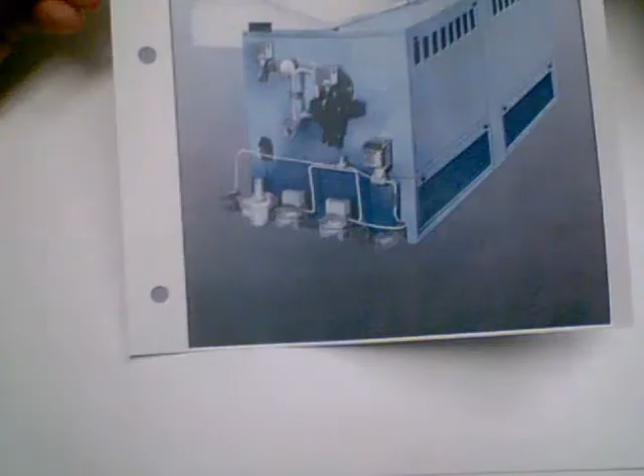First of all, it is a boiler, so it's steam, not hot water. Sometimes people are confused by that. It does actually generate steam, and it looks somewhat like this.

It is the source of heat for the office side of the church, the two floors, the chapel and so on, and in the upstairs offices is all radiator steam heat. The other side of the building, the sanctuary, Ackerman Hall, narthex, all of that is forced air, and that's what was replaced recently with the 5 new forced air furnaces.

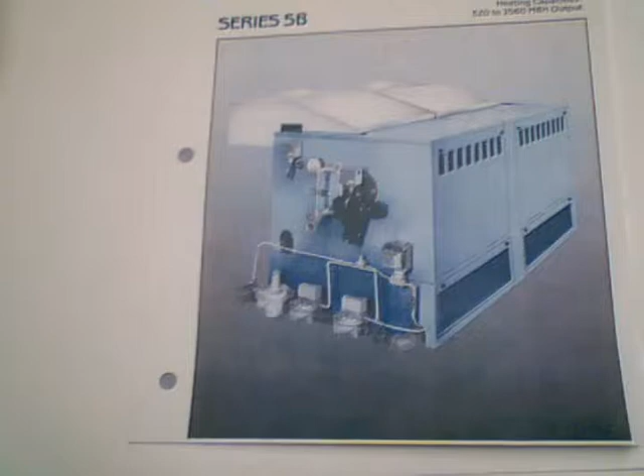The boiler is about 12 years old. It was replaced in about 1990, I believe, 92, somewhere in there. And of course the piping and the radiators and so on are all original to the building, about 85 years old.

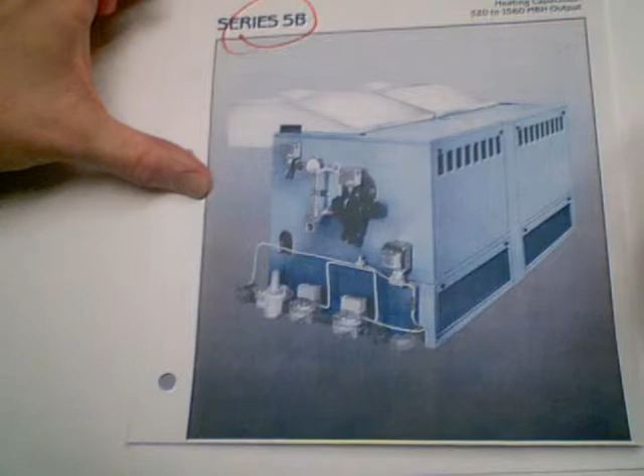So this is a Burnham Series 5B, and it looks just like this. However, we only have one section. This comes in multiple sections, so we have one section. And we'll have some video here shortly of the actual unit, but what I want to do is just show you some of the controls so you can see that it's really fairly easy to understand what's going on with the boiler.

All this is a big cast iron tank. It's actually sections in here and so on. But it holds about 50 gallons of water, and it boils the water and makes steam.

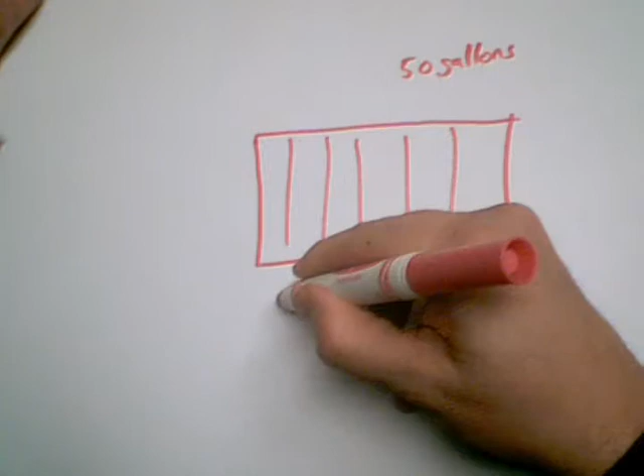It's just that simple. So underneath here is a big old burner. It goes underneath the entire section of cast iron firing tubes, and then this fills full of water to a certain level, and then the steam comes off.

And there's two very, very large pipes, which is sometimes confusing when people see why there's two pipes, but that's because we need to equalize the pressure here, and we have more and more sections. We have to have more and more pipes.

Now, I'm not going to get into all of the physics of the header and the Hartford loop and all this kind of stuff, but there is some funky looking piping up here where they're combined, and it actually comes down and then back up around like this, and it goes up into the headers, and there's a reason for that, and it's for safety reasons and for getting dry steam, so that the moisture drops off of the steam, because you don't want water to carry with it.

It's called carryover. Now, safety is extremely important, because steam has the potential of doing major damage. Even a small boiler like this one could take out a section of the building easily.

A Burnham boiler of about half this size blew up about 3 years ago in Inver Grove Heights, I believe. It's on the State of Minnesota website, and it took out a good part of the house. The larger boilers, you can see pictures, take out entire plants, city blocks, things like that.

So if you've seen a water heater like a Mythbusters blow up or something, you can see that they really take off. But this is cast iron, and it's built for like 600 pounds burst pressure, which is several times that of a water heater. It certainly has a lot more heat going into it, and it's designed to deal with steam, not just hot water. So it's got a lot of potential for devastation and damage.

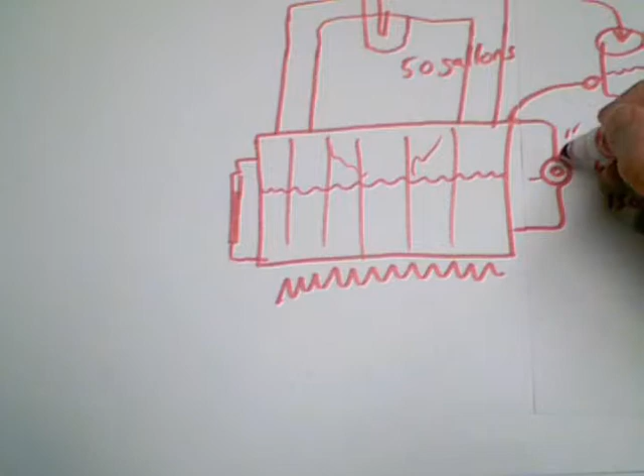So over here is a tank, and in that tank is feed water, which comes from the condensate coming back from the radiators—we'll get to that in a second. The condensate comes back, goes into this tank, and just hangs out there, and there's a big pump that feeds into the back of the boiler. So when the water drops to this level, the low water cutoff valve kicks in and turns that pump on enough until the water comes back up and turns that switch off again.

So that little float thing just goes up and down. It's got a second switch slightly below that, which is the actual low water cutoff—commonly called the low water cutoff valve—but that first one is a feed water switch. The second one, slightly lower than that, is the low water cutoff, and if it gets to that level, then we need to disengage the boiler. So the switch just opens in that case and shuts the boiler off, turning the power off to it.

So switch number one makes contact and turns the pump on, and switch two breaks contact and shuts power off to the unit.

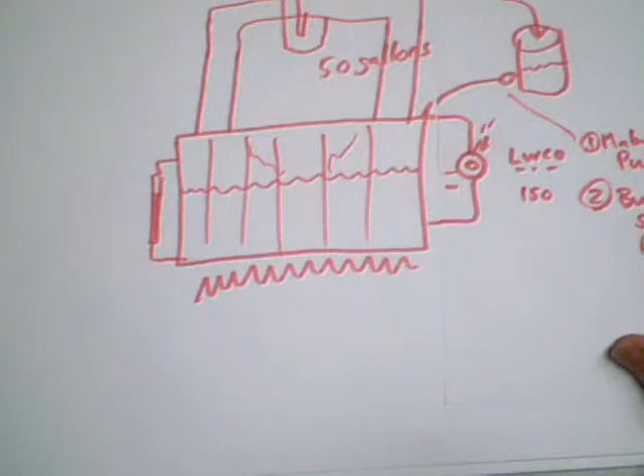Okay, so that's our first line of defense. I'm going to keep a little table over here. The three things we care about for safety are low water, high pressure, and gas pressure—that's what we care about. We're very worried about the first two particularly.

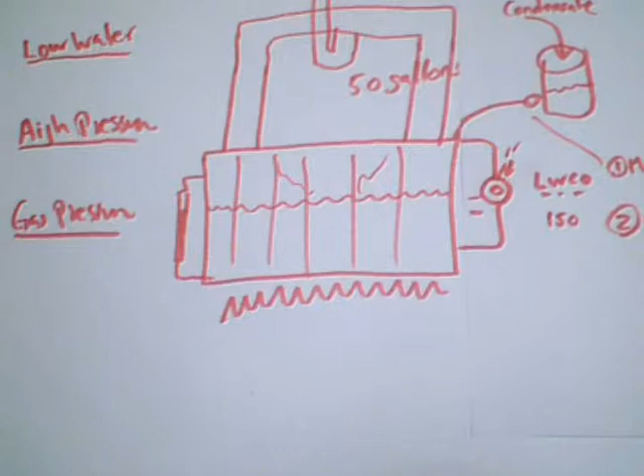So just like a plane has, we have to have redundancy, and we have to have backups to backups. So the low water cutoff, the 150 valve, is the first line of defense. If it gets to be that low, the system shuts down. But that little ball can get gummed up.

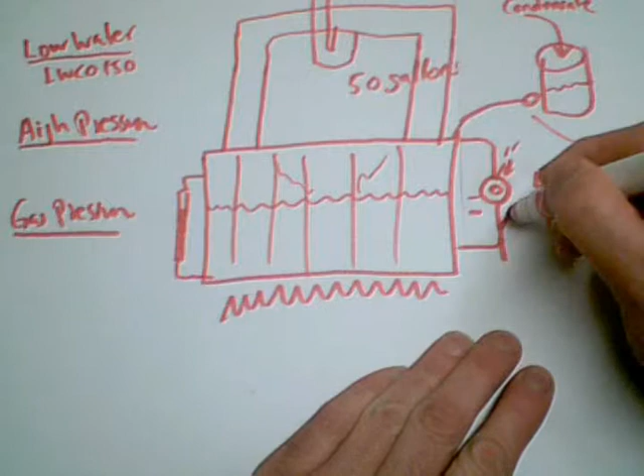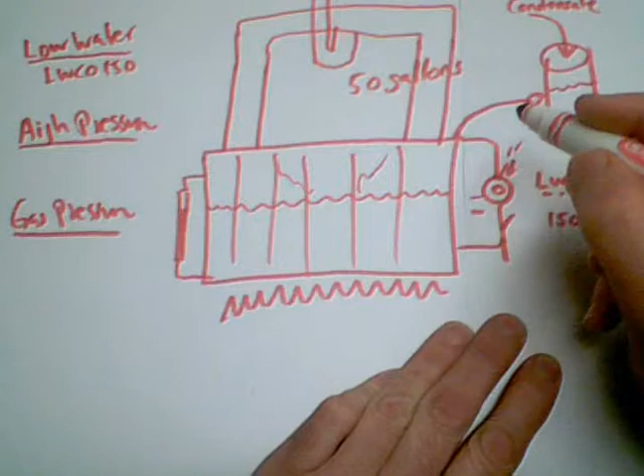In fact, that's what's called a blowdown valve—it just has an open pipe, and it allows you to open that up and thrusts the water down. The idea is to open it fairly quickly so the water comes charging down and cleans out any sediment in there. You do that typically every day, because boiler water tends to be kind of gunky, particularly when it's coming through old pipes and so on, so that gums it up a little bit from time to time, and this cleans it out.

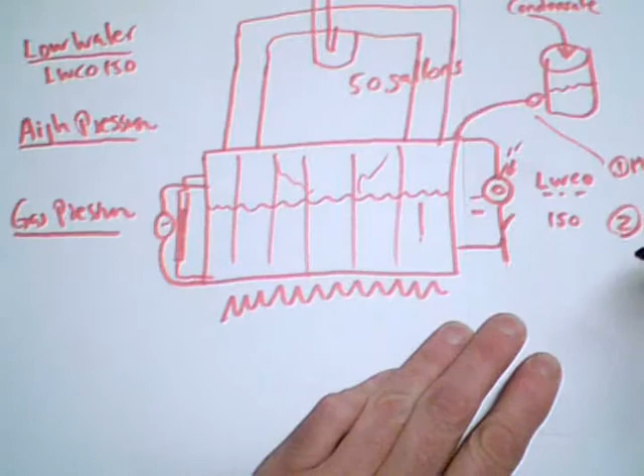But if it still gets stuck, we don't want to keep firing and let the water go down and down and down. So over on this side we have another valve, essentially the same thing, just another pipe that comes out with a valve and a float. Slightly different design—this one is a model 67 for us, and it also has two switches, but they're at the same level, so they both engage at the same time, but they're set even lower than this one is.

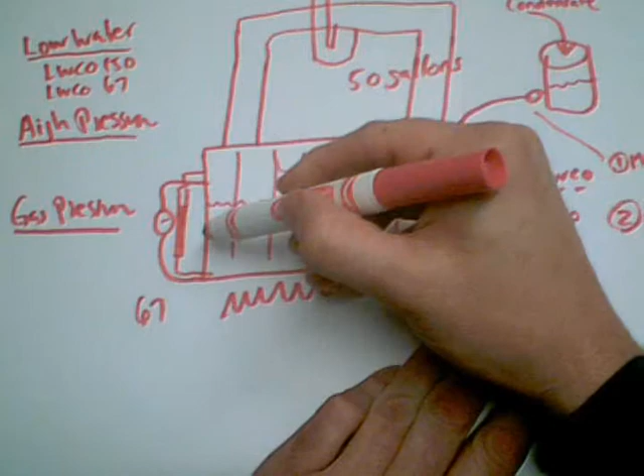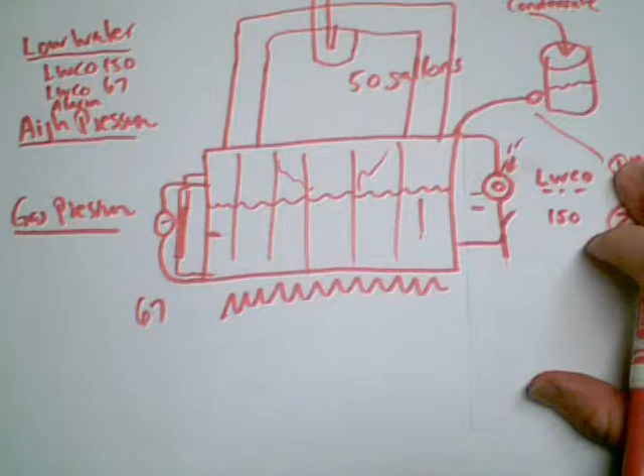So they're the next line of defense. That would be the low water cutoff 67, and then the second set of contacts in here—I actually had it wired so that sends off an alarm, an audible alarm saying that we've got major problems, and that's battery backed up. So even if the power does go off and the water remains low, it's still going to keep on honking, and if it gets to that level, we're in serious trouble.

Now let's look at the pressure. So those are the two low water cutoffs—every boiler has to have at least two, and notice that they're on opposite sides, just in case there's some damage to the cast iron structure or something of that nature that causes the water to be uneven.

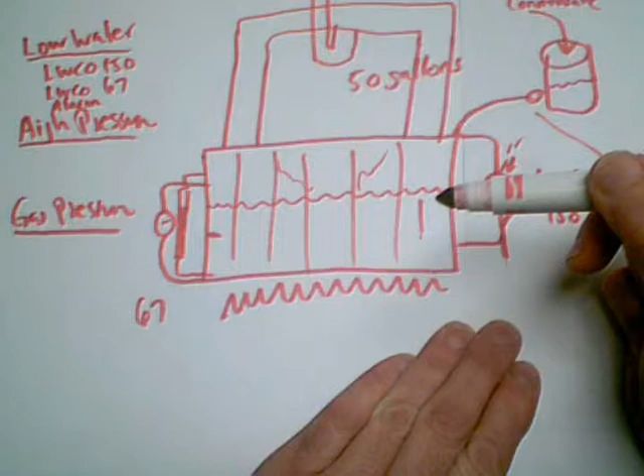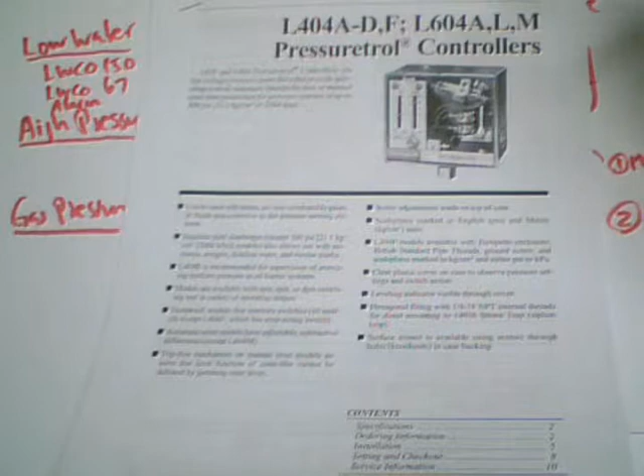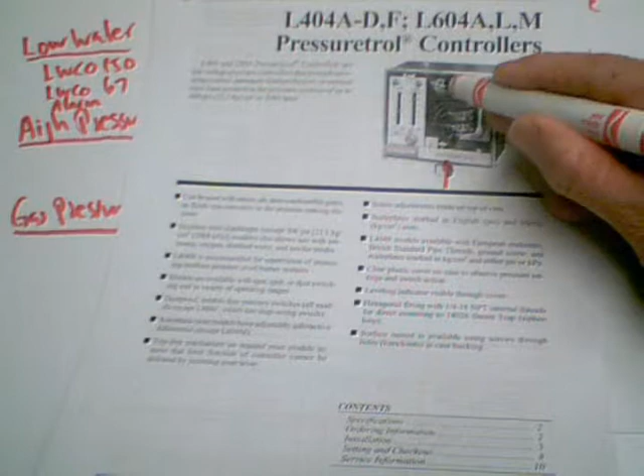The high pressure is over on this side of the boiler. There's a tap coming off the side of the boiler where the steam pressure is building, and it comes up into a little box called a Pressuretrol. It looks like this - not much to these things. All they do is have the pressure come up here, and there's a little spring in here, and a mercury switch that tips based on how much the pressure pushes this little plunger up and down. You set it for a particular pressure.

We'll get into that here in a second. So that's going to be the high pressure operating valve, the first one, because we actually want the pressure to only go so high, and then we're going to shut it off, let the steam circulate, and when it drops down again, we'll keep going. So this one is not so much a safety device as it is an operating device - we're going to call that the operating control. And that's a Pressuretrol.

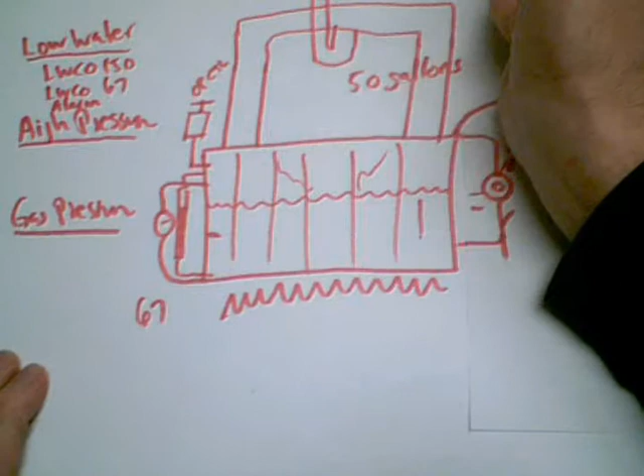And then there's going to be another one hanging off this as well. It can be the same type of model, it can be different types of pressure devices, but same concept - this is going to be the high pressure cutoff. So the operating control may be set for 1 pound, 1.5 pounds. The high pressure might be set for 4 or 5 pounds, saying that if it reaches that level, we need to do the same thing as that low water cutoff did, and just shut the power off to the boiler so that the flame goes out and the pressure will drop.

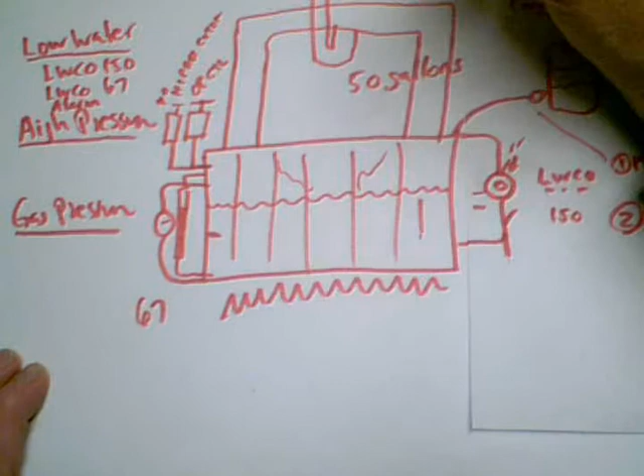So we have a pressuretrol over here, which is the operating pressuretrol, and then we have the safety pressuretrol - I didn't leave enough room for this big magic marker.

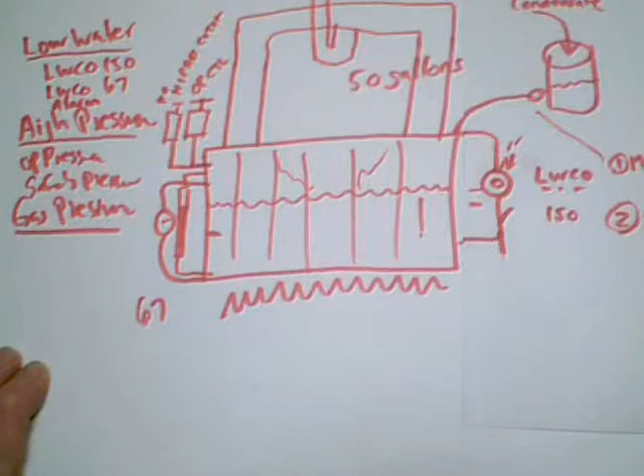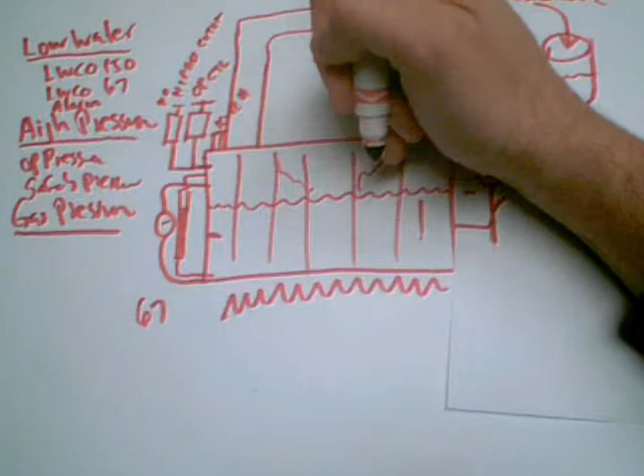And then thirdly, on this side, we have just a mechanical device - it's a relief valve, the same kind of thing that's on your water heater. It's just another valve that sits over here, and it's a mechanical valve that is set at the factory to go off, usually at 10 to 12 pounds. It doesn't have any electrical characteristics to it, no switch or anything to shut off the boiler - it just opens and dumps out the pressure at that point. So that would be the third line of defense, the relief valve - kind of like the water heater has a relief valve.

Alright, so low water cutoff has 3 lines of defense, high pressure has 3 lines of defense, and then the gas chain is similar to that. I'm going to cover that real quickly because it's not really a big deal for us.

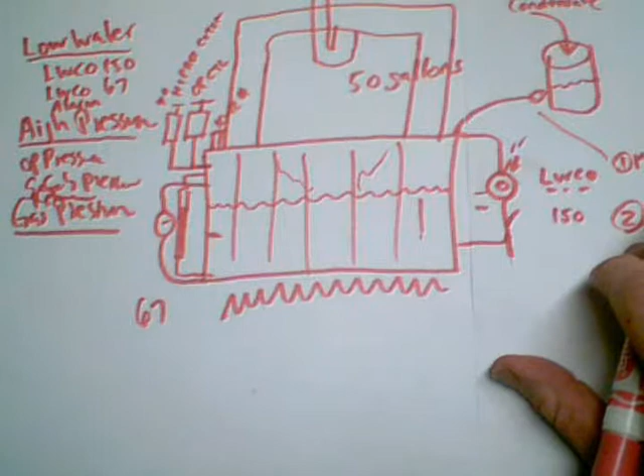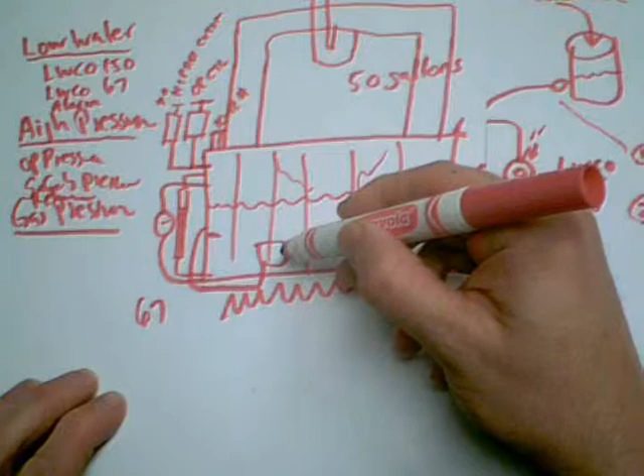The natural gas comes in and pipes around the side and into where the burner is. We have to have 2 gas valves so that they both are turned on at the same time for gas to come through, just from a safety standpoint again. We also have to have a device up here, right by the burner, that senses gas pressure to make sure that it's not too high or too low. And then in connection with that, there's a flame sensor to make sure the flame is actually there.

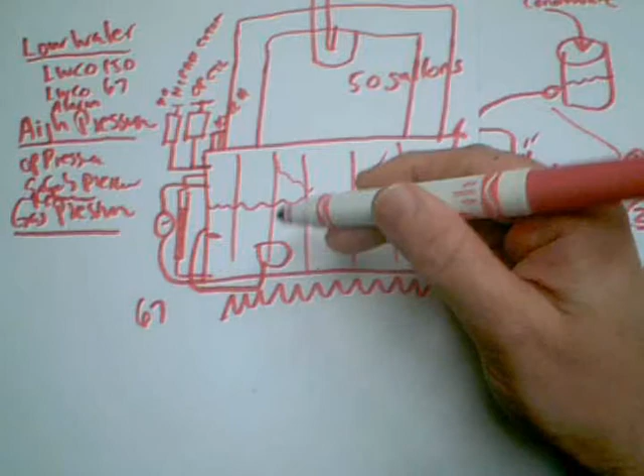Those two sense the flame for the pilot at least, and then that activates the gas so it comes in and lights the main flame, and the sensor looks for the main flame. If for some reason the main flame or the gas pressure gets too high or too low, it shuts off one or both of those valves. So the same type of deal - you've got a pressure control and a flame sensor, and that will shut down the unit if there's a problem with the gas. We're going to focus on the first two, the low water cutoff and the high pressure, because that's really where the lion's share of the issues are.

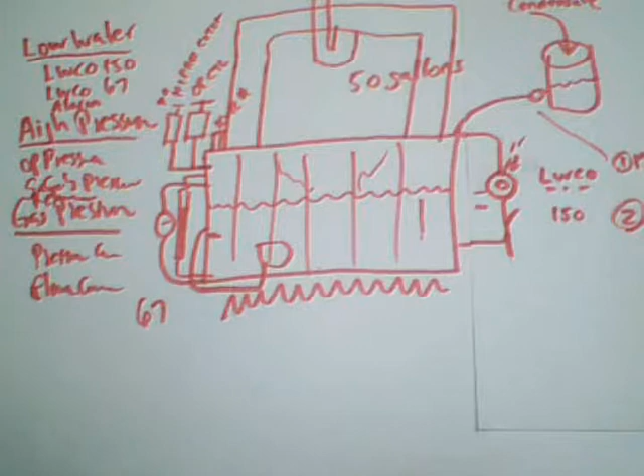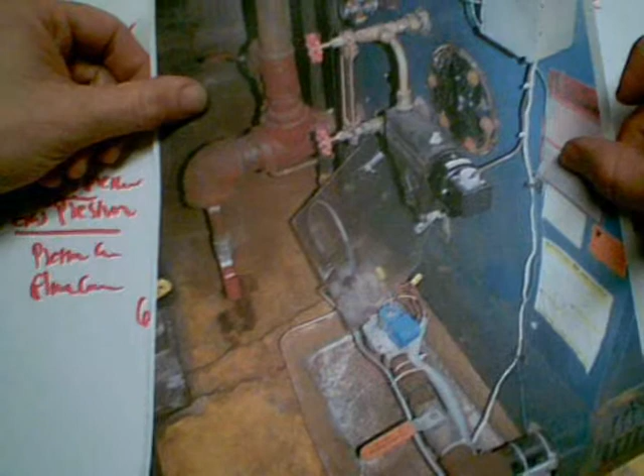This is the left-hand side, which is going to be over here, so you get kind of an idea of what it looks like. This is that 67 valve I was talking about, and you can see that it comes out of the boiler here and comes down around and goes back in - you can't quite see that part. And then here is that sight glass and valves to shut the water off if we need to. I need both of those.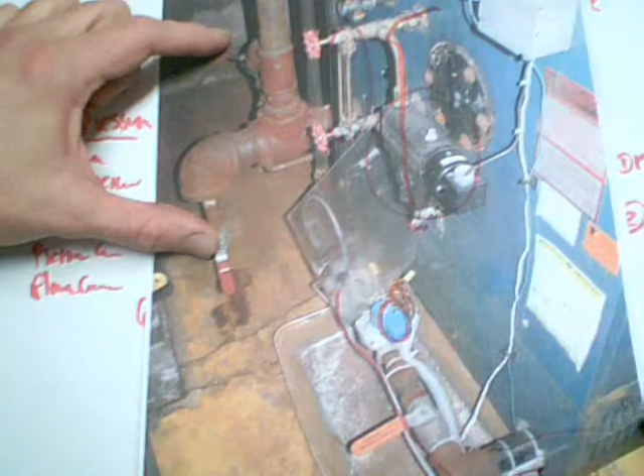Here's a gas valve - there's another gas valve inside of there, and here's the cutoff, and then the gas comes in here, and the other gas sensor is in there.

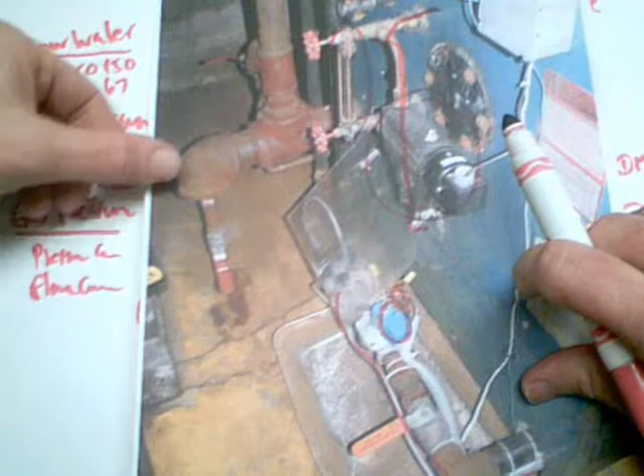There's just a piece of plexiglass here, so this thing sometimes drips, that keeps the electronics down below, or the valves down below, from getting wet. So that's what that looks like.

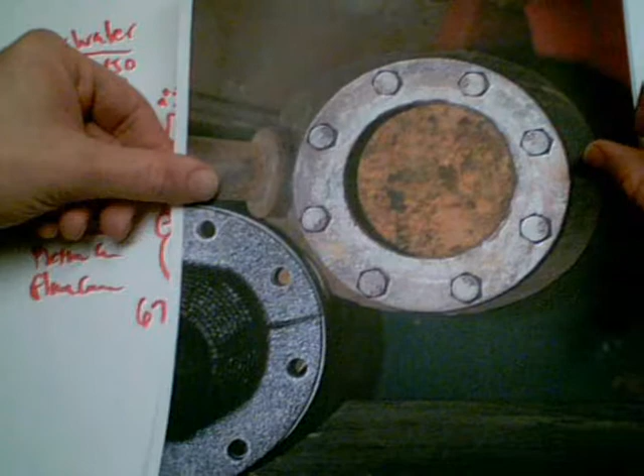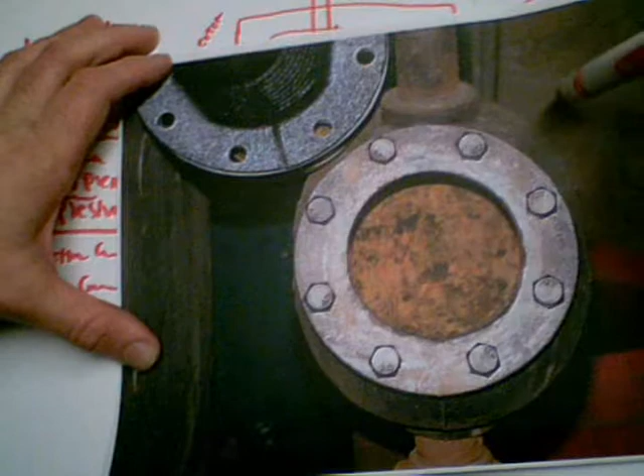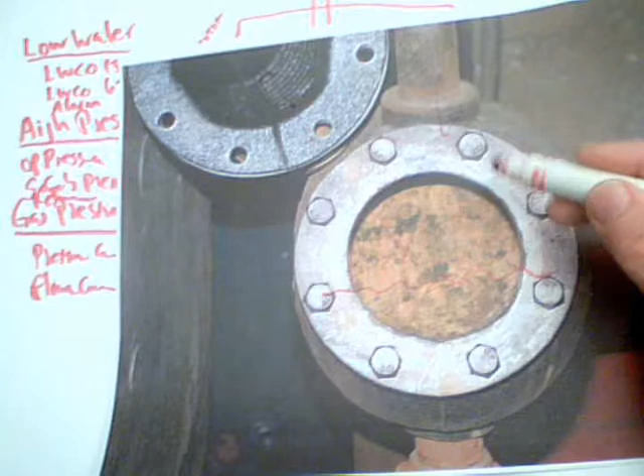I don't really have a picture of the right-hand side, but the 150 valve is kind of an ugly beast. It's this big steel ball. This one is taken apart for the season, so you can see inside. This is the piping that goes up and the piping that goes down, and the water just sits in here. This part sits on top, and the bellows here extends out, and that's where the electronics or switches are. The ball, which you can't see right here, goes into there. So it's just a big old steel hunk of a beast, but very expensive.

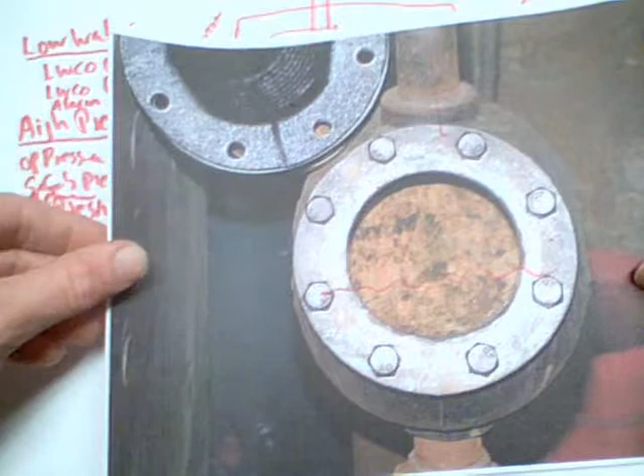All boiler parts are very expensive because of the pressure involved, and the labor is incredibly expensive. So let's take a real quick look at these guys.

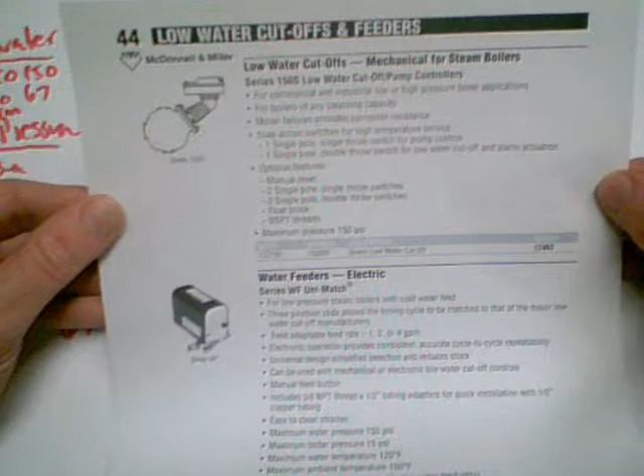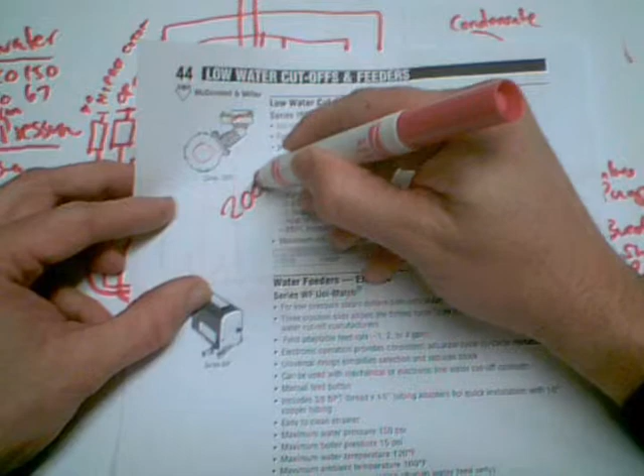McDonnell Miller 150 low water cutoff, that's what it looks like. The big ball is inside the bellows, and up here are the mercury switches—at least the old mercury switches. We now have regular toggle switches in there. This thing sells for well over $1,000, about $2,000 installed, and it only has like 8 bolts. It just bolts on, and that's about it. So that gives you an idea of how much they charge for this kind of stuff.

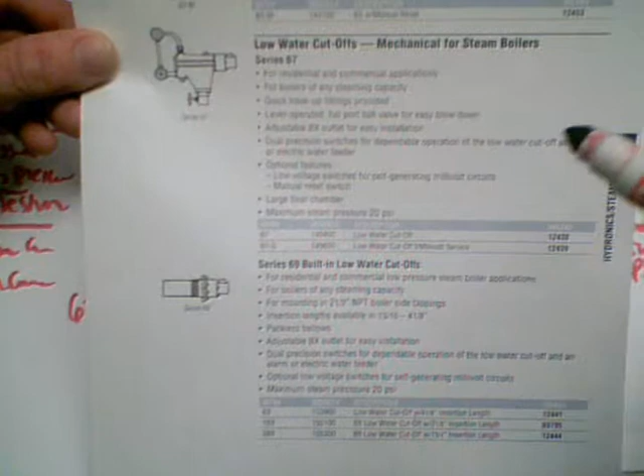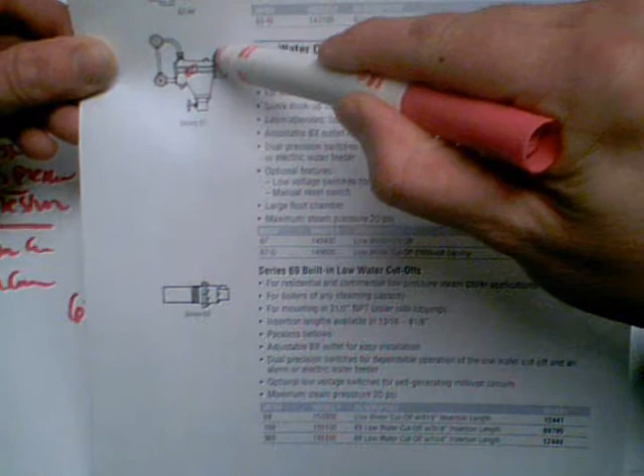This is a catalog page for the 67 low water cutoff, a little different configuration, but again there's just a little ball, and they're a lot smaller, with the switches over here. The one thing I didn't mention is that this one actually has a manual reset.

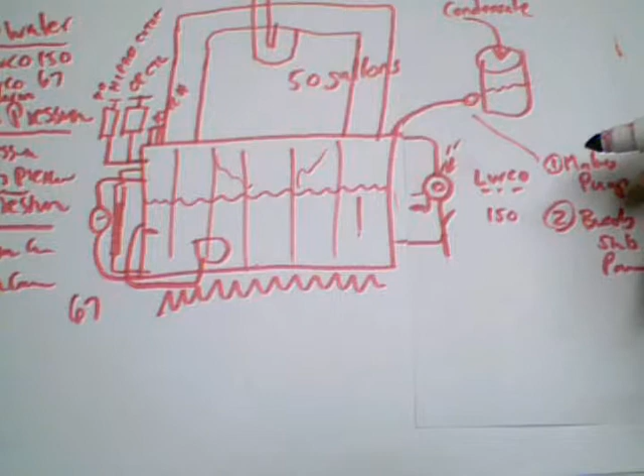So on the 150, if we hit the low water cutoff, it shuts the system off, but if the water regains—which it typically would, maybe just drop down for a few seconds—then the switch re-engages and the system starts back up again, no big deal. The one over here, though, is a safety device. Once it gets to that level, you can't start it back up again.

Ours doesn't have that right now, but it's not a good idea to have the second low water cutoff hit and then just magically reset, because there's usually something wrong at that point, and you shouldn't be messing around with that. So there's just a little button you have to push to reset it; otherwise it won't start back up again.

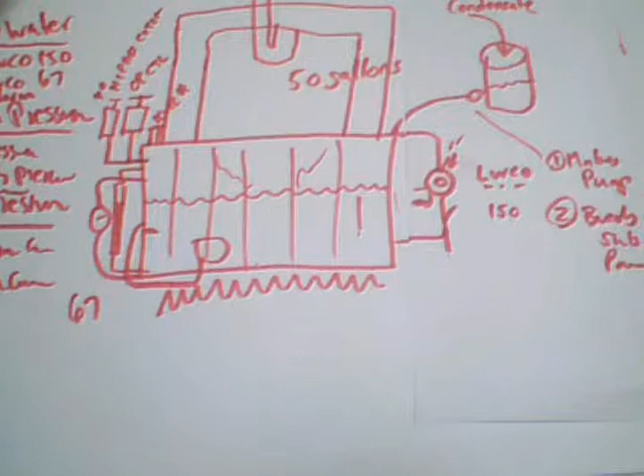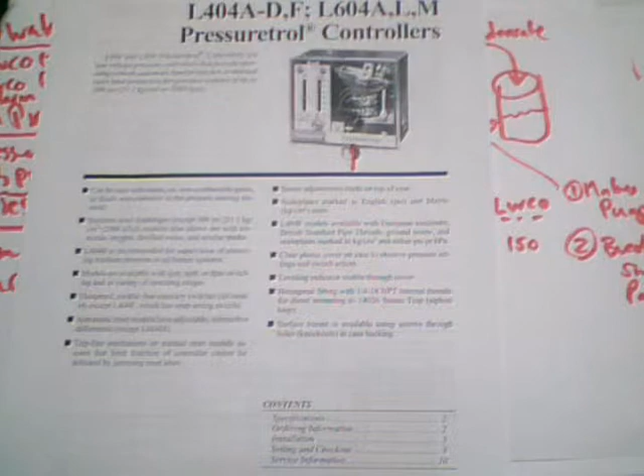Same thing goes with the high pressure. Pressuretrols look like this, and right now we have 2 Pressuretrols in there, I believe, but when the system was first put in, we actually had something even worse—Pressuretrols are not that great to begin with. We had a Pressuretrol for the safety high cutoff, but also one of these goofy little boxes like this, which is essentially the same thing but a far less precise device.

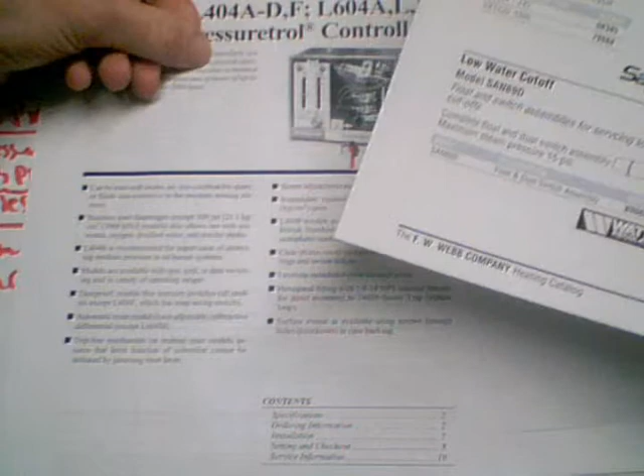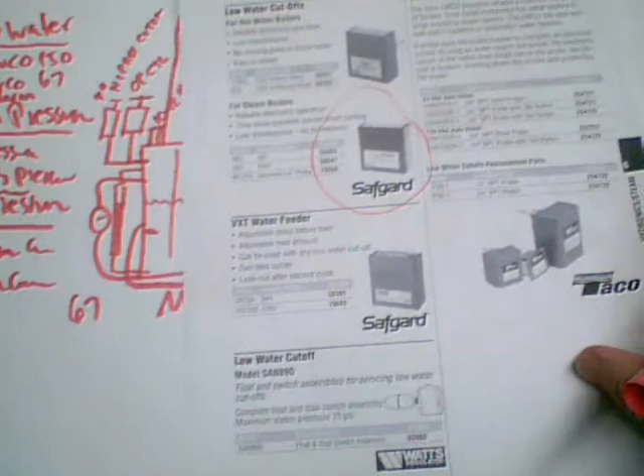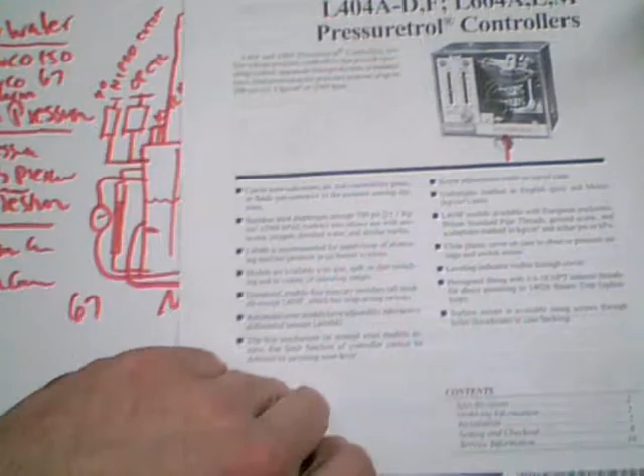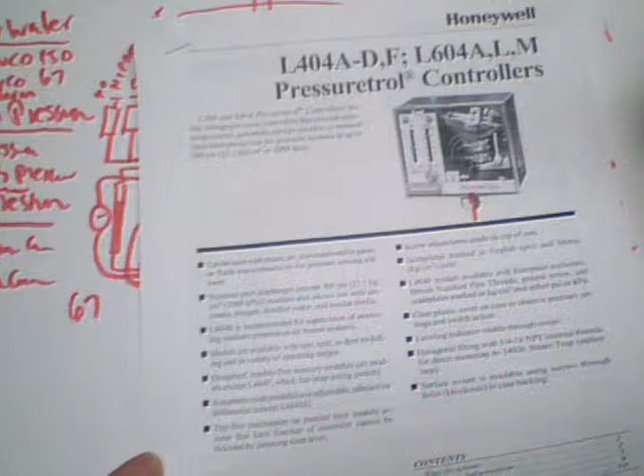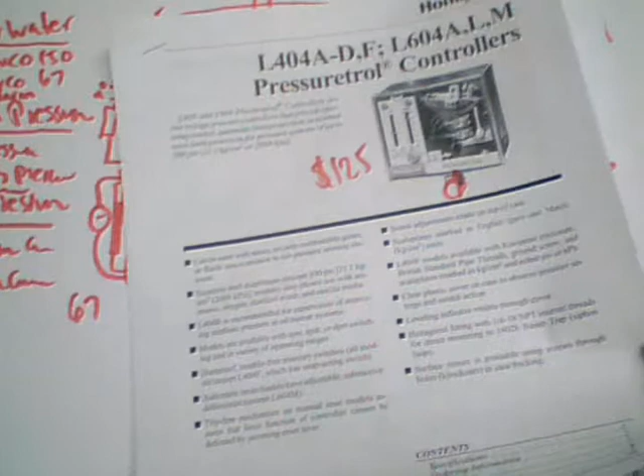We'll talk again about the problem with Pressuretrols here in a little bit. This device isn't terribly expensive, a couple hundred dollars. You can buy them brand new on eBay, or through an HVAC mail order place or a web place, for probably about $125 or so. There's just one fitting to put on and two wires, so they're fairly simple to install, and they're somewhat considered a wear item—one, because they're so critical for safety, and two, because they just wear out like everything on the boiler near-side trim. That's what this piping and controls right around the boiler is called, near side. All that stuff tends to only have a 3 to 5 year life just because of the abuse it takes. So in this case, it's a fairly reasonable cost.

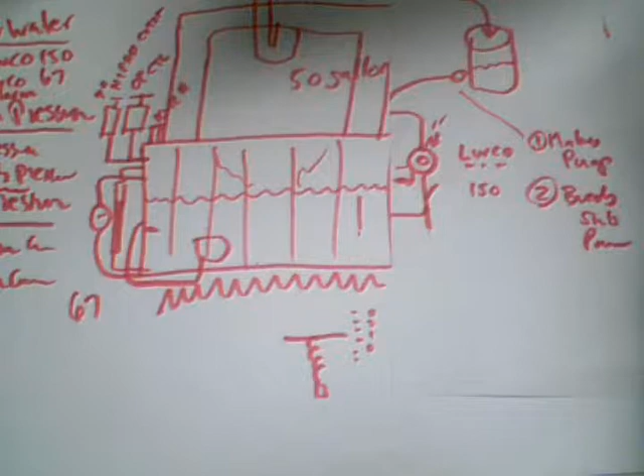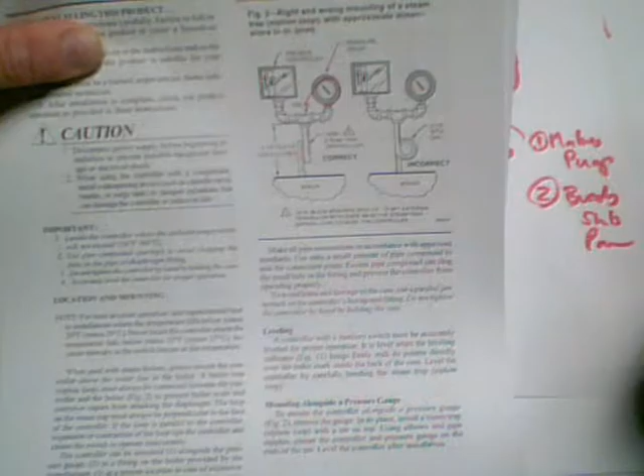This is kind of how it looks when it's hooked up. There's usually a gauge over there so you can manually read it, and that's about it.

So now the second high pressure, the safety one, is pretty simple. It just, when it hits a certain pressure, shuts the circuit off. But the operating one is a special type of control.

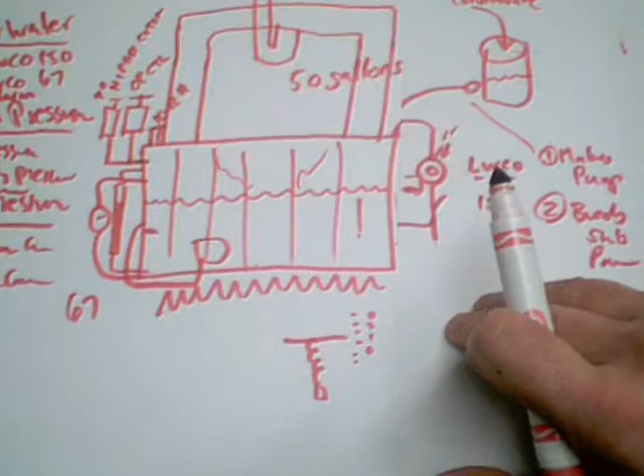It has actually 2 settings, and it uses a differential. If you remember the forced air furnaces, we had a differential there because we didn't necessarily want the call for heat and stop the call for heat to be at the exact same temperature. So it oscillates and tries to go from like 69.9 to 70 to 69.9 to 70.1.

You want to have some kind of range in there of a differential. Same thing here. We don't want the pressure to get too high, so we want to shut the boiler off when there's enough steam pressure, and then re-engage it again when the steam pressure drops to where it's not able to circulate through the piping. So that would be the differential range. The operating control, that pressure control, has 2 settings on it.

Let's take a look at that real quick. Over here on the right hand side, you'll typically put in what your operating pressure is going to be. So we may say 1.5 pounds. And then on the one over here, we'll say what the differential is going to be, and we may say a 1 pound differential. So that means it's going to range between 0.5 pounds and 1.5 pounds for the operating range.

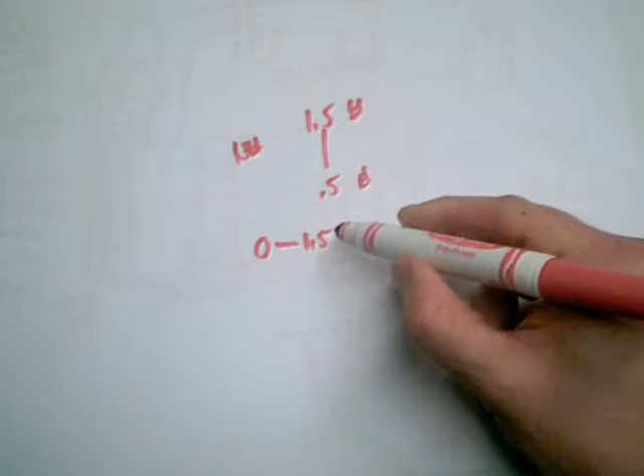Now the wrinkle to this is that it can't just operate that way, otherwise it would never turn on. So it actually will operate from 0 to 1.5 pounds, and when it hits 1.5 it will disengage, and then as the pressure drops, it only has to drop down to 0.5 to turn back on again, and then it brings back up to 1.5. As long as it stays in this range, it'll just go back and forth.

Once it drops below the 0.5, then you have to start over again. It has to go back to 0, and that would be because there's no more call for heat. So it lets the steam pressure bleed off, it drops to 0, and when there's a call for heat again, the thing starts over and goes from 0 up to 1.5. That's the one aspect of that particular pressure control that is somewhat unique and does confuse some people because of that differential.

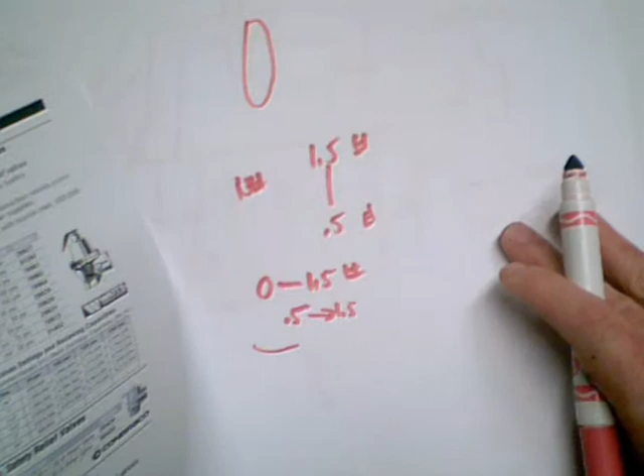A little bit about radiators and so on. I think for the most part they're pretty self-explanatory. It's a 2-pipe system. You've got the radiator up here, with the sections, and they're all hooked together. The steam comes in through a valve with a control, and then down the bottom on this side it comes through what's called a steam trap, and then goes back as water. So steam comes in and water comes out.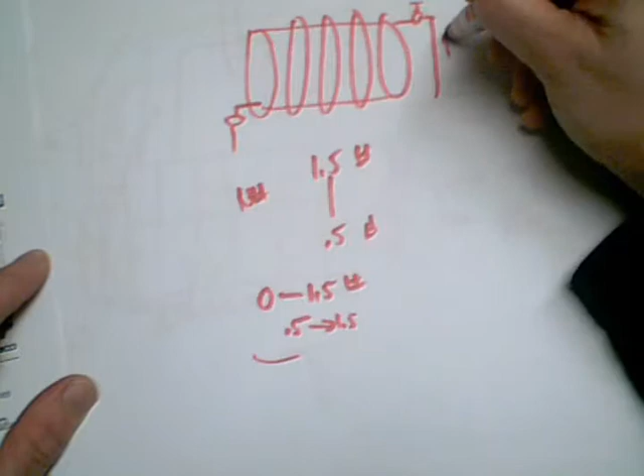This is just a simple valve, just like you would have on home plumbing. It's no big deal, other than the fact that it's expensive and it's a steam certified type device, but it's just a valve to regulate how much steam goes through the radiator. We'll talk more later about why that's not quite as simple as it seems.

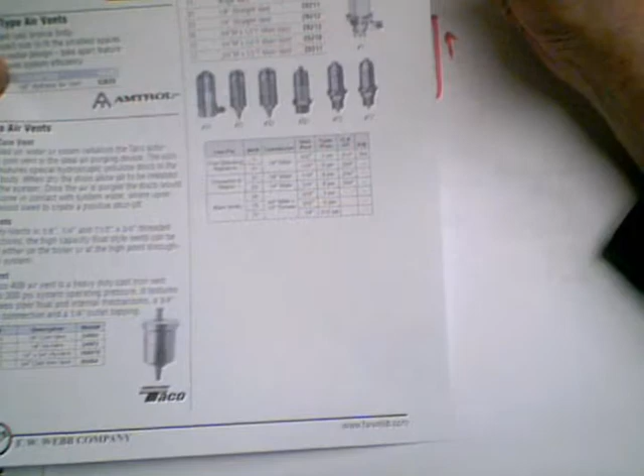The other thing that's typically on here, if it's at the end of a run or a long run, there's going to be a little air vent sitting off to the side. These are almost always forgotten, but extremely critical for even heat and energy efficiency. All they are is just little pressure devices that allow excess air to escape. As you're moving steam in for the first time, this thing's all filled full of air. The air's got to go someplace, and it can't go down this way because there's a steam trap here which blocks that. So it just builds up air pressure, and the steam kind of gets stalled, partially coming in.

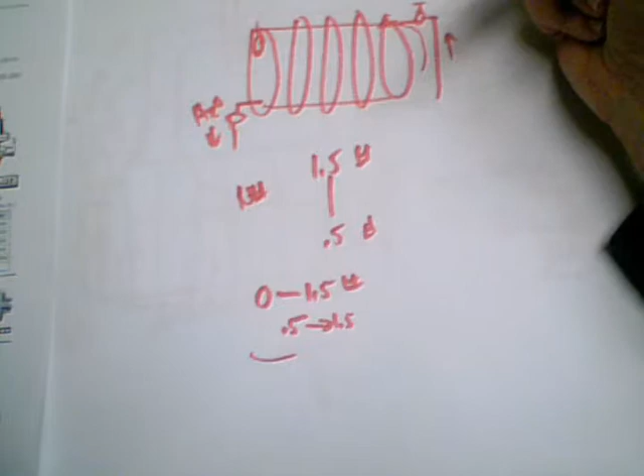So somewhere along the line in these radiators, you need to have these vents. There's a huge vent down in the boiler room at the end of the line, but you typically want to have them, for example, in the 2 restrooms. That's a major problem because you're moving the length of the building worth of piping plus the radiators just to get steam down there. And if you have to push air along the way, it's going to be a long wait. Otherwise, it should not be very much of a long wait at all. The steam moves very rapidly.

They get plugged up, need to be replaced, but they're very reasonable in the $50 range, depending on if they're just for one radiator or for an entire line.

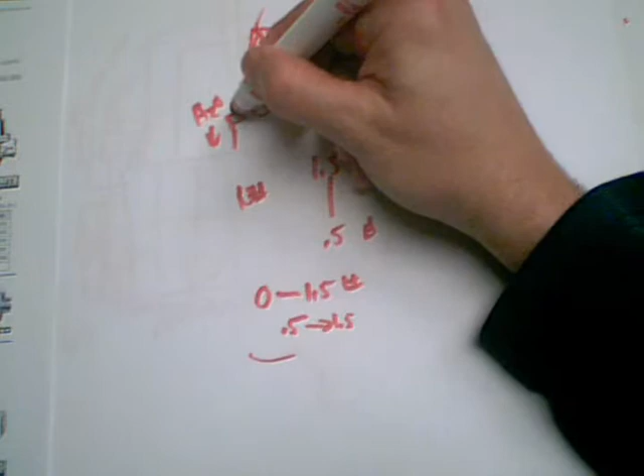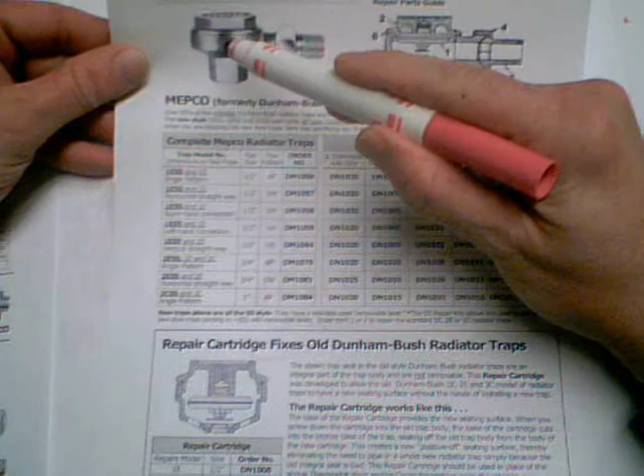The steam trap is, I'm sure you've seen these. This is like a MEPCO trap right here. They've been around the building, right now I believe they're gold. They look like this. This would be hooked up to the radiator, and this goes down through the floor.

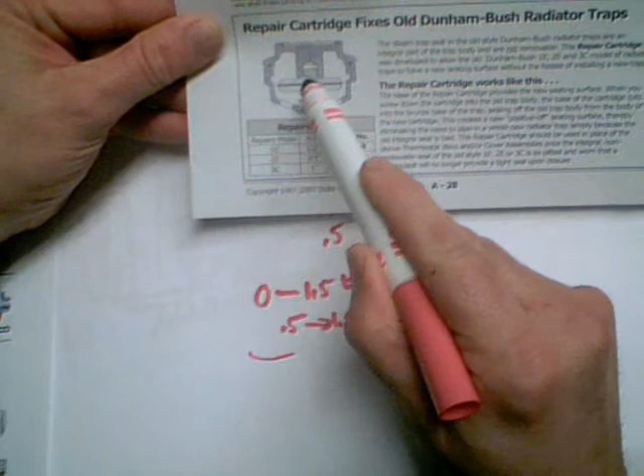All they do is separate steam from water. So there's this little tiny disc in here with a thermostatic device. This thing goes up and down, and it moves thousands and thousands of times each year, and that's why they wear out.

It doesn't allow the steam through—it closes when the temperature is such that it's still steam. As soon as it cools to become condensate, it opens a little bit and lets the water trickle down, then closes again. So it oscillates back and forth based on temperature to keep the steam in, and lets the water out. Otherwise, the steam would just make a round trip and we wouldn't get very far. So the steam traps are critical.

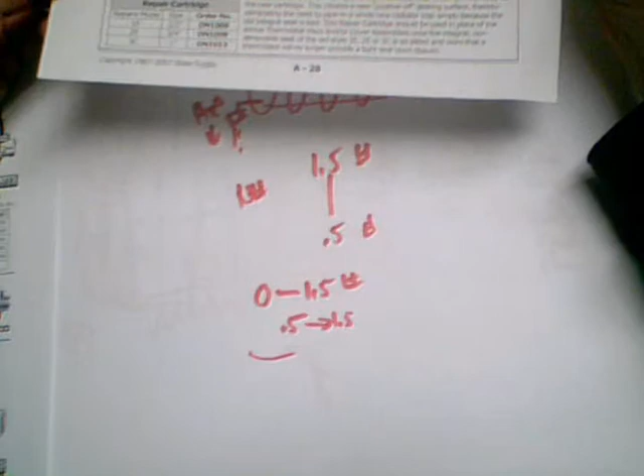If they aren't working, they typically stick open, which means the steam just makes a round trip and ends up going into the recovery tank downstairs and out the main vent, just being wasted energy. Not a good plan. Plus it causes carryover and hammering and things of that nature that are hard on the system and drive up enormous energy bills.

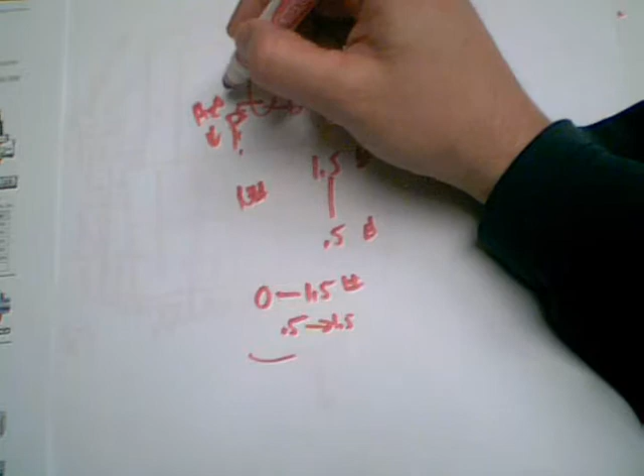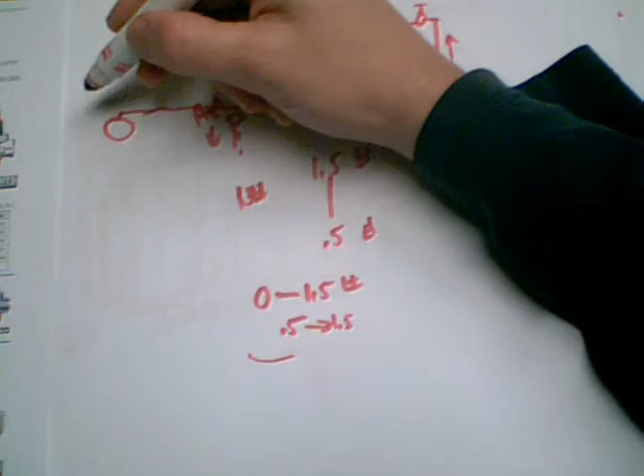We're going to talk a lot more about radiator traps. There's also end-of-line traps, which look just like radiator traps, although some are much bigger. At the end of the line, you have to get rid of the excess moisture. As the pipe continues throughout the building past the last radiator, you still have to get rid of the water coming out of that. So at the very end, like the main headers here on the two office floors, there's a big old steam trap that just lets that condensate through.

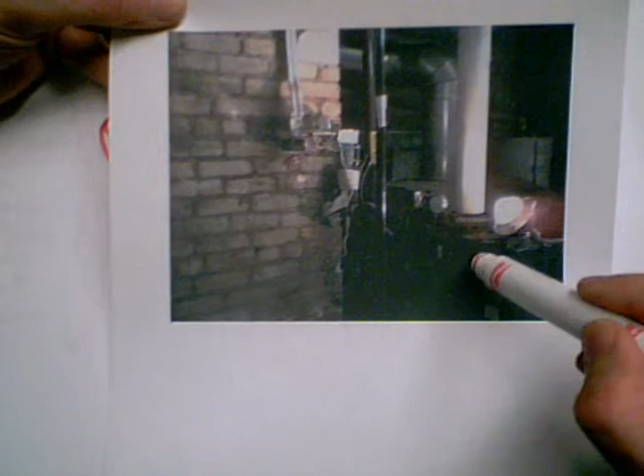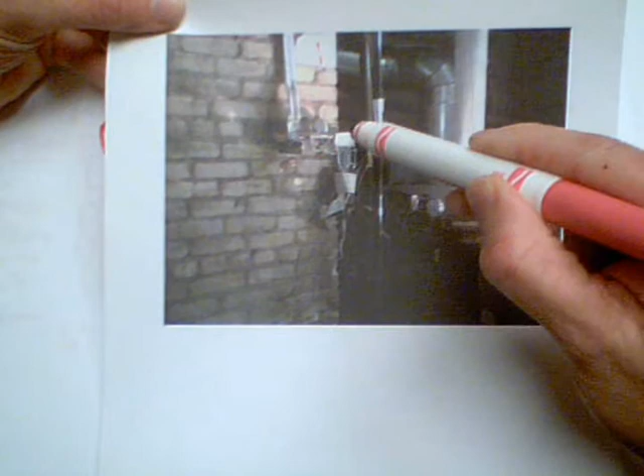Just out of interest, this is what the control area looked like when I inherited it. Here is the boiler, this is the giant flue going into the chimney, and this is one of the steam header takeoffs. This is the relief air shaft that goes all the way up to the attic, but the controls—it's hard to even see—were just a relay and some hard wiring stuck to the wall, kind of taped together and somewhat labeled, and that was about it.

Over here is the pressuretrol and the manual gauge, and the wiring went down here, but it was hard to trace, and you had no clue what was going on. If something was wrong, you didn't even know if the system was running or not. It just had this relay hooked into the thermostat up in the chapel.